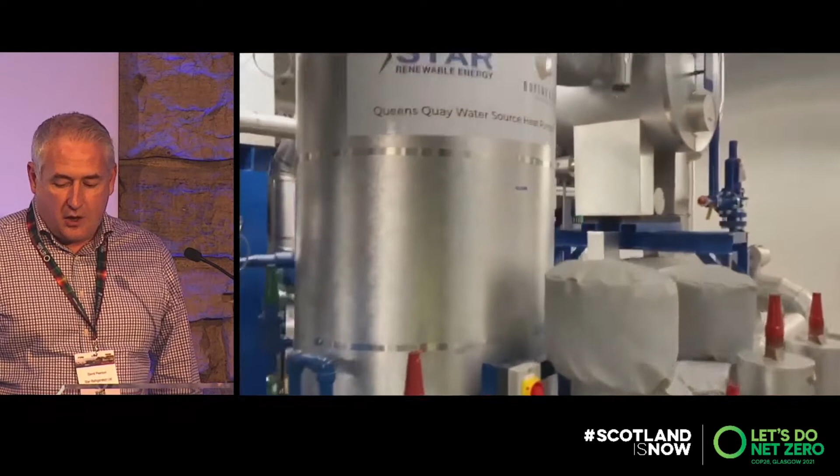So, video speaks louder than words or pictures or whatever. Here's a quick flyby of what's going on down at Queen's Quay. The building you can see with the red archway, a tribute to the past. The site is John Brown's. A quick walk around the plant room, taken quite a long time ago. Sorry about the rubbish in the corner, that's just every job.

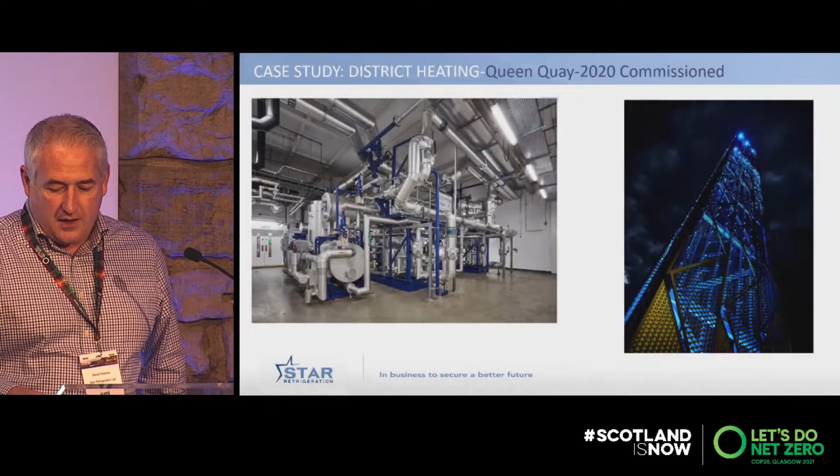And the heat pumps, and I'll explain a little bit more about these as they go, but I think you've probably already got the impression this is not a little box, this is a big heat pump. And there's a better picture, and some brilliant architectural features went into the job as well, because they're very proud of it down there, and so they should be.

So, thinking about this roadmap we keep hearing about, I tend to think more in terms of a destination. What do I want to find when I get there? Whether it's 2050 or 2045 or halfway there by 2030. Really, there's a whole suite of different things that we want to find as we go forwards, and you can pick any of these as your favourite. But for me, it's probably somewhere between local jobs and clean air. Definitely the renewable energy piece.

I definitely think at some point the UK government's going to realise that importing 50% of the gas we burn is probably undermining the economy, and doing a better balance of that. But the interesting one for anybody in the broader energy context, smart grids, is fascinating. How do you get users of electricity to work better with suppliers of electricity? And there's not been nearly enough academic research on that to try and synchronise these grids.

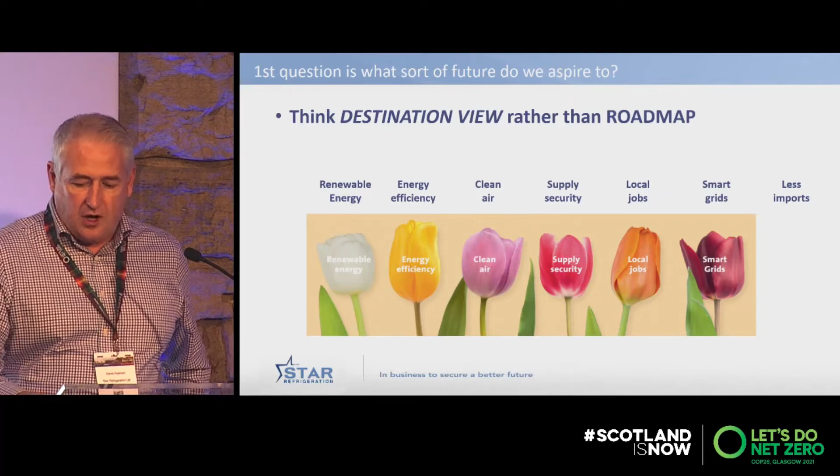So, the really important thing, and it was a brilliant question that Paul Steen asked earlier about different stuff, and there were some good answers to it, but the simple answer is there are lots of different places we use heat.

This building that we're in just now, I'll bet you any money, it's heated by gas. It's very different for a brand new house that's been built on the outskirts of the city, which is very different from a house that was built 5 years ago, which is very different from the tenements of Shawlands or the West End. And equally very different from the stuff down next to the river. There's some brilliant building work going on. We have to solve all of it, but it's all slightly different.

It shares some of the same challenges that I'll walk through, but really it's about finding a heat source for all of these. It's about finding that heat demand, which we know exists because we use so much gas, but it absolutely has to fit with a return on investment, and that's about having a positive ROI and actually being able to do something. And the slightly crazy thing at the moment is we're trying to be as cost competitive as gas, which is the thing that we really ought not to be doing.

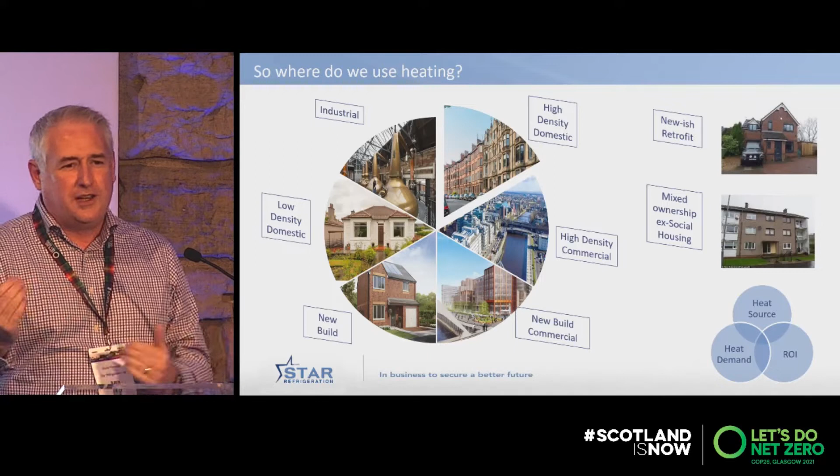It's kind of like saying, you know, do you prefer eating salads or donuts? They're really quite incompatible in some sort of ways. I obviously prefer donuts to salads.

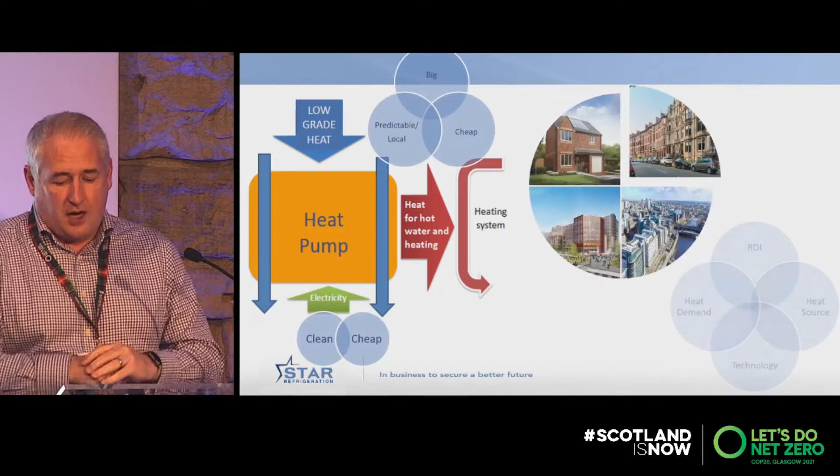So as we step through that and into what a heat pump looks like, the diagram was used earlier, there's the bit where the heat goes in, the low grade, in our case down at Queen's Quay, it's the river water. And in the case of the electricity, where does that come from? South of Scotland has got a really low grid intensity factor. It's 59 grams of carbon per kilowatt hour right now. So a heat pump with an efficiency of 3 is effectively creating heat for 20 grams of CO2 per kilowatt hour. That's 10% of burning gas.

So this is a job that really is almost a home run. I really feel I should take the rest of the day off and just relax. But it's done that job. All we have to do is more of it. That's the key thing to say.

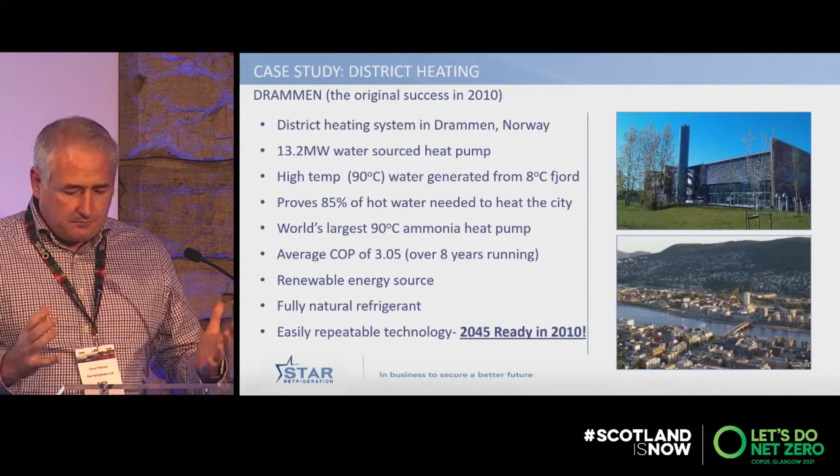So, was it a big risk? Well, in some respects it was for everybody, but equally, we stand on the shoulders of giants. We didn't invent heat pumps. We happen to do them a particular way using natural working fluids because we think they're more environmentally friendly. But the first job we did was 10 years ago in Norway, and they certainly weren't the first people to do heat pumps. It goes all the way back to 1852. It was talked about in 1855 in an Austrian salt mine. It was actually done. But it's really just about finding the place where you can do these over and over.

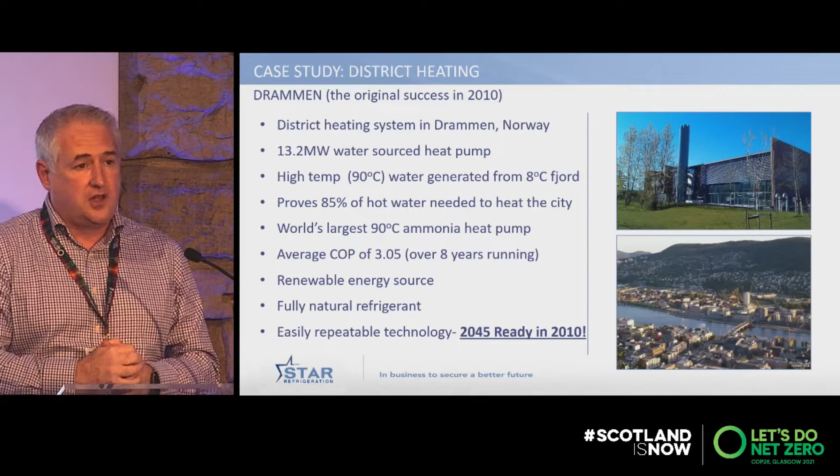So we did it in Norway. The client asked us to. They asked us to do 90 degrees, which had never been done before, with ammonia as a working fluid. And they asked us to do a saltwater fjord, which really brings some challenges in itself. So that gave us the confidence when topics came up of what could we do in Scotland.

Now, to put this in context, in 2011, the UK government announced the non-domestic renewable heat incentive. It basically paid about twice the cost of burning gas not to burn gas. A massive big push towards doing something different. Up until 2018, however, there was no tariff guarantee for this. So what that basically meant was the investor, in this case West Dunbartonshire Council and the government, would have to build the entire project, get the commissioning certificate, hand it in and then say, A, can I have that money you promised me, and B, how much are you going to give me? That clearly is not an investable proposition.

Very pleased to see Eddie McAvinchey from Scottish National Investment Bank up there. We were joking at lunchtime. Definitely more steady Eddie than risk-taking crazy Eddie.

Investors like surety. That's the key thing. What is going to give you a return on investment? He'll lend you lots of money, but he wants it back. That's the very simple proposition. So steady Eddie is the way that we all have to be thinking.

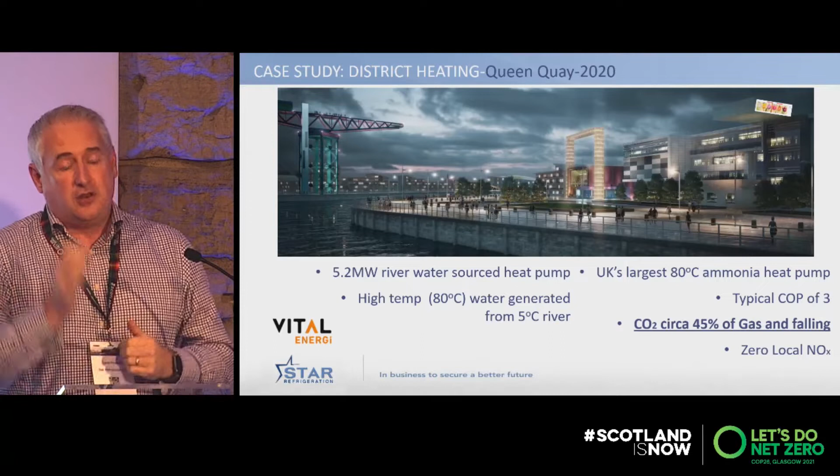And in Queen's Quay, in 2018, they did have this change in policy. It took 3 years for the government to change the policy, and then it changed, and then there were 2 years left to use the non-domestic renewable heat incentive, and now it's finished. Don't forget that point. I'll come back to it.

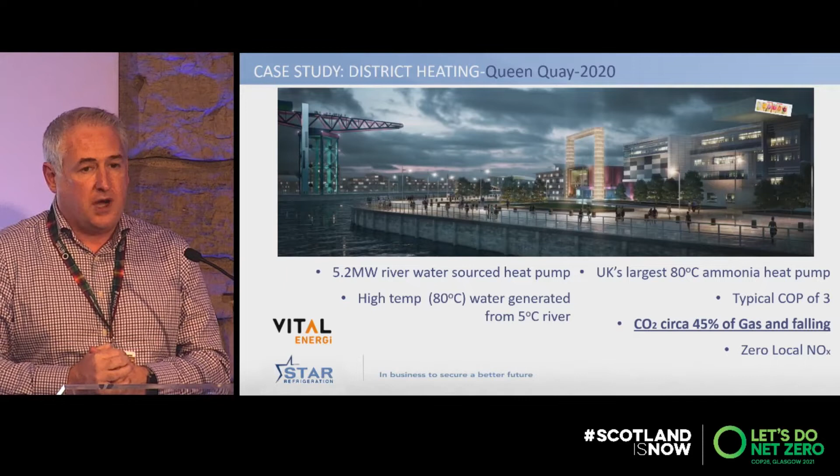So, Queen's Quay, an artist's impression, but really it's beginning to look a lot like this. We've got the buildings that are being built out, and there's a whole suite of different stuff I'll not dwell on, but all sorts of different types, and some of it's new, some of it's small, some of it's big, and some of it's old stuff that's been there for years. And it's there. It's being heated by the district heating system. It's in the building there.

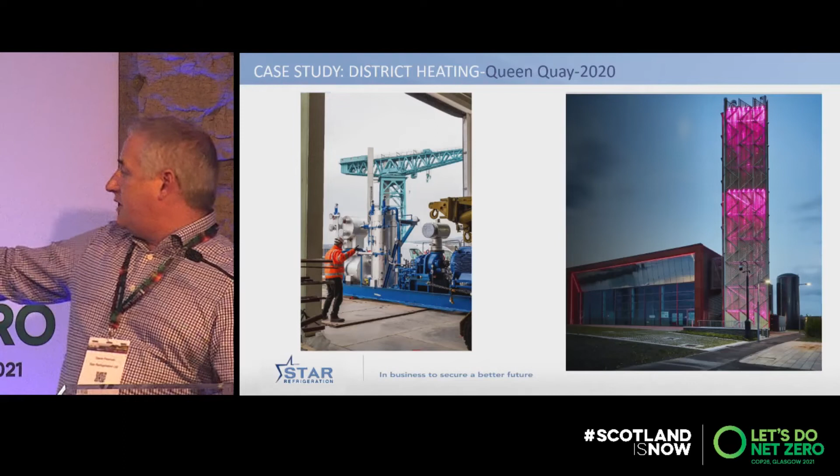I should point out the relatively small structure there is a thermal store, and this is part of the strategy of maybe don't buy electricity when it's really expensive, buy it earlier, make some hot water and keep it for later, and there'll be some really interesting stuff that we can expand in that. Spoken many times with Andrew Bissell over many years, but what if we did some sort of phase change thing to get even more thermal capacity there, which basically just means, this is a very Scottish way of looking at things, buy what you need, but buy it cheaper earlier. There's a sale on in the morning, but not in the afternoon.

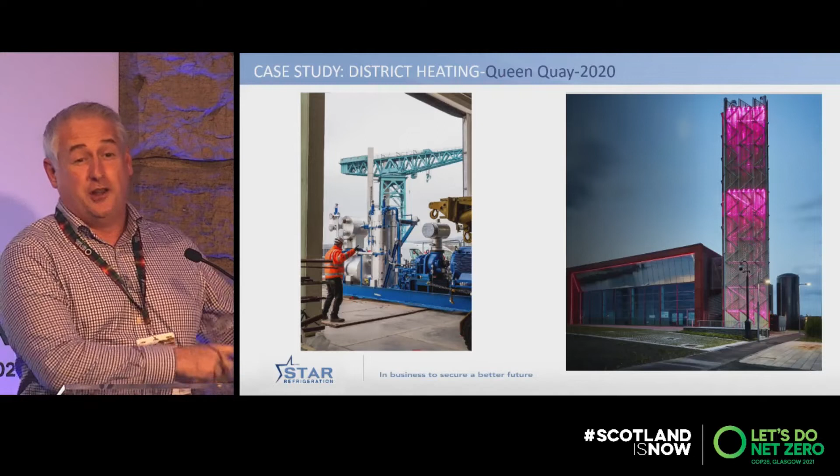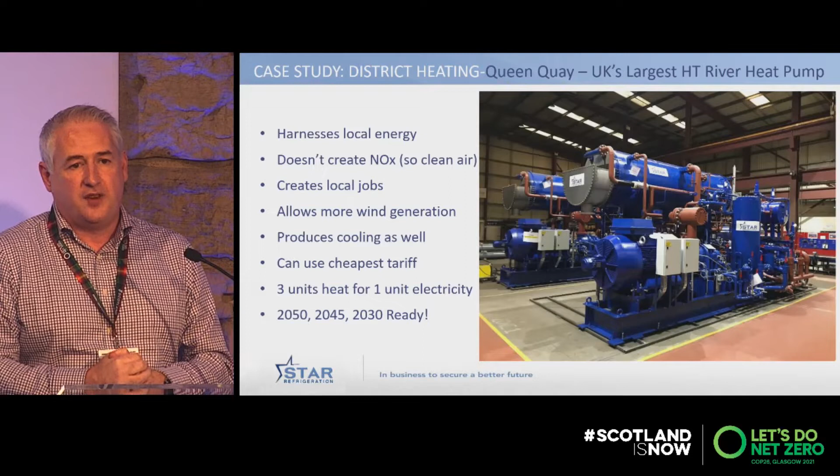So, obviously very proud of the heat pumps and all sorts of different factors about this as well. Could we do cooling with them? Yes, we could. Being fit for whichever generation we're aiming at, but really taking it forwards from today, they are really going all the way to 2050 in terms of decarbonisation. So, into the bit that really excites me, heat pumps. I must admit, I find them a bit ordinary now, and so many people are talking about them. It's really brilliant. Heat demand is the bit that really matters.

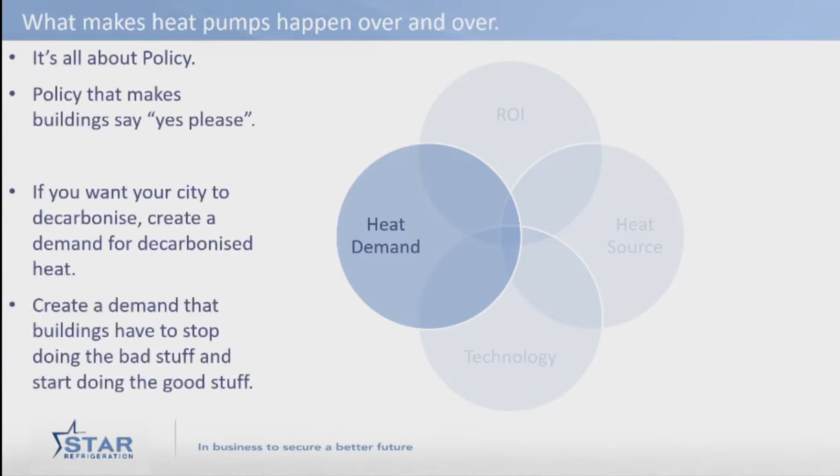There's absolutely no point building district heating round Glasgow, for example, if you don't know that the buildings are going to buy from it. Offtake surety is the fancy way of saying it. And really that, A, has to exist later on when it's in operation, but B, if you're planning to ask for lots of funding from somewhere or take government money into something, you really need to know ahead of that how much heat demand there will be.

So our vision, certainly for the future, is that we try and create this pledge that the buildings, this building, for example, should be being asked by somebody, what's your plan to decarbonise? It very much fits with what Julie was saying about LHEs. But don't wait until there's a district heating maybe about to happen. Do it now. It's the sort of thing that could be written in policy. Soft policy, I believe, is a techie term for it. It's not legislation, but it's definitely a big hint of this is what might be coming.

So what if somebody said to this building, it's highly likely to decarbonise, that we will have to create some sort of pain around burning gas or air quality, if you pledge to join district heating when it arrives in 5 years, because it's complicated, make no bones about it. But if you pledge now, you'll get a much better deal.

So get these pledges racked up, and then when we go out to the investors, be it Vattenfall, SSE, Engie, there's several of them. What if we're going out to them and saying, we've already got 50% of the building saying, yes, please, I want to be part of this story. That's the way that you get the investment coming in at the lowest price, and that's the way you see Queen's Quay 2, not to pick up on the fact that it was where the 2 of the Queens were built.